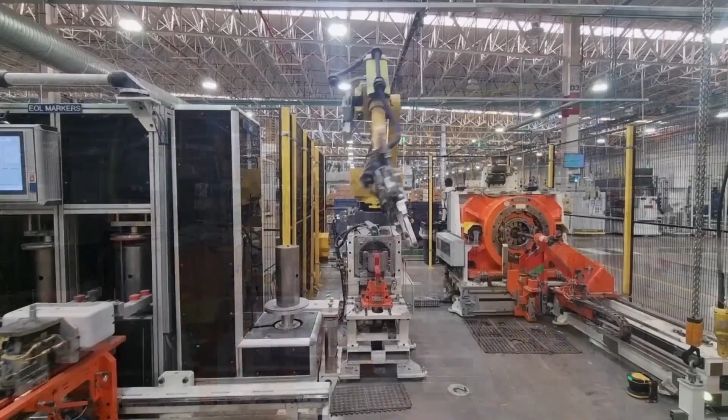Assembly lines may look like smooth operations, but it's chaos, full of disconnected systems, data silos, and clunky integrations. In this video, I show you why it's time to stop piling on multiple systems on top of your assembly line and start with a solid digital foundation. Let me introduce you to the concept of an assembly line operating system, a smarter way to build, scale, and future-proof your assembly line.

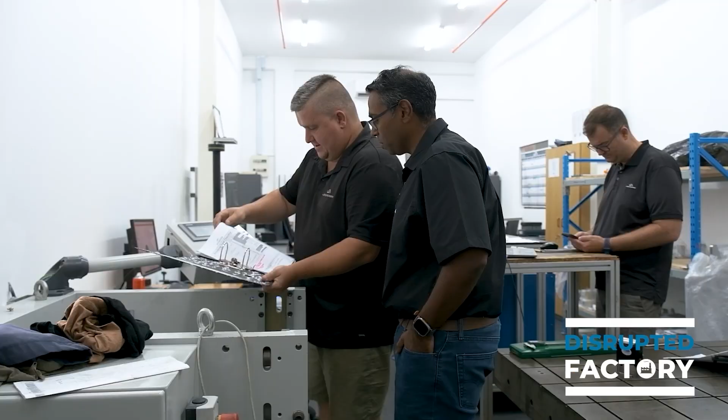So I've been in the trenches for the past 20 years, building production lines around the world. On this channel, I share with you my real-world experience for anyone looking to make a real impact in their factory. Whether you're a plant executive, an engineer on the floor, or anyone eager to expand their knowledge on this transformation topic. Let's dive in.

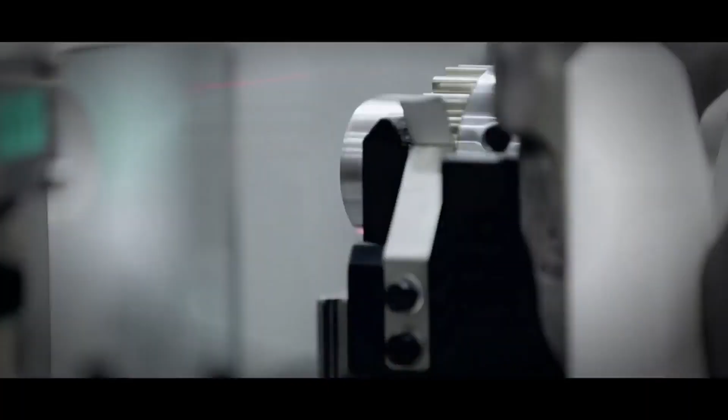Especially when you walk down a production line and you see a bunch of automated stations, assembly stations, manual stations, semi-automated stations, you kind of judge the assembly line for what it is and what you see there. Often what is misunderstood is that there are a lot of other supporting systems around that production line to actually make it work. The objective of this talk is to talk through some of those systems and why I think they're much more complex than what people think.

So to do this, I've prepared a couple of slides. The first one is really around the three main elements that need to be brought together to make a production line. And that's people, objectives, and technologies.

On the people side, we have the managers, operators, maintenance technicians, logistics personnel, line supervisors, etc. Each of these people have different objectives. So obviously productivity, availability, quality, safety. We want to train operators faster. We also want to reduce work in progress on our shop floor to reduce the cost and improve cash flow on our production lines.

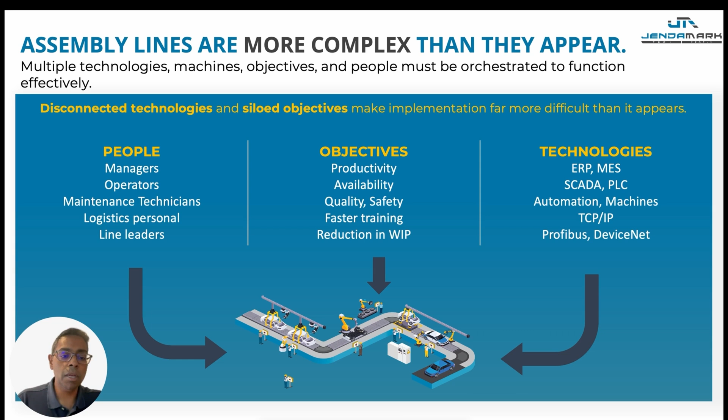And then there are a whole bunch of technologies that also need to be integrated together. So you think of things like ERP, MES, SCADA, PLC, etc., and all the different communication protocols, TCP, Profibus, DeviceNet, and that's just to name a few. There are a lot more technologies that need to be pieced together to make an assembly line work. And all of this needs to be put together and squashed into this production line to make it work. This is where we end up with disconnected technologies and data silos that make the integration of all these systems far more complex than what it may seem like at the beginning.

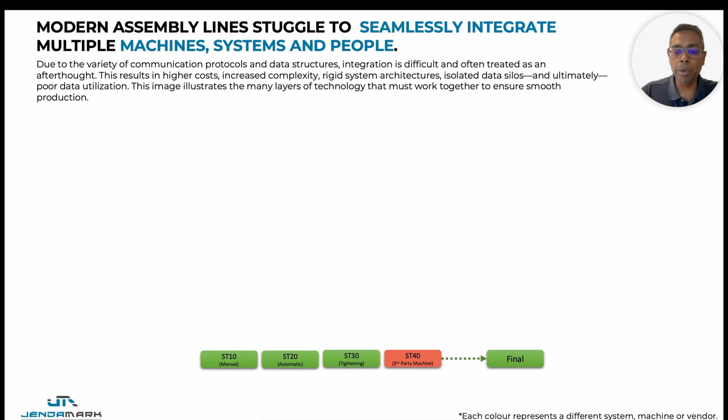Just for explanation purposes, I've got a dummy production line. Here I've got station 10, which is a manual process. Station 20 is an automatic process. Station 30 is a tightening operation. Station 40 is a third-party machine that's integrated onto this production line. Think of a testing machine or some specialized leak test machine, for example. And then we obviously have a final station where the part is inspected.

So let's build up this production line. Obviously we have some sort of transport system, so you think of a conveyor, an AGV, or a trolley system. We also very often have sub-assembly processes that need to feed into the main line. So if you're assembling an axle, there's a corner that must be assembled, and that gets fed onto the main axle assembly line.

If you have manual assembly stations, often we need some sort of worker guidance, and this could be anything from a piece of paper to some complex digital system that is implemented on the production line. What I wanted to highlight here was every single unique color on this slide represents a different system or even a different vendor that is required to implement that system.

So already we've got 3 different vendors that might play a role on this production line, and 4 if you consider the conveyor system. Then we have a bunch of automated machines. So you think of a press fit, gauging, testing machines, sometimes camera inspection stations. These are all typically PLC-driven stations.

On the tightening side, we have obviously a wide variety of tightening tools. So you think of Atlas Copco, Bosch, Desoutter, Georges Renault, and the list goes on of the number of tightening tools that are able to be implemented on a production line.

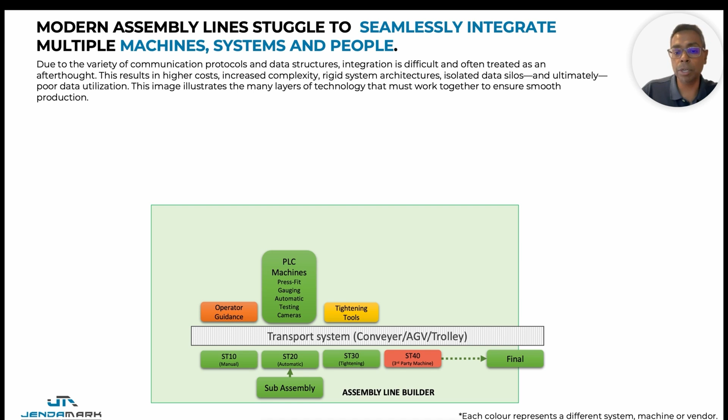And all of this that I've collated into this green box typically represents what a machine builder or a line builder would deliver to a production facility. So think of an engine assembly line, an axle assembly line. It could be a medical device assembly line or a tractor assembly line. By and large, this is what a line builder or an assembly line builder would deliver to a customer.

But obviously, the production line requires a lot more than just these elements. So let's move on. Obviously, every production line needs a sort of final buy-off, and this is where the system would go in and check all of the previous processes and make sure that everything is good before, for example, printing a final sticker.

Many production facilities have an end-of-line quality inspection, and this could be anything from a piece of paper and a clipboard that is used, or even some sort of digital system where it's on a screen and the quality inspector will now press a series of buttons to confirm that everything is good.

This is often linked to a rework or a teardown station. Often the rework and teardown station is an afterthought. So, for example, if they find a problem at the end of line quality inspection, or there's a problem with the buy-off, a product would typically go to a rework area or a teardown area.

Or, for example, if one of the processes failed at the tightening station, it might go to a rework area, for example, to be either torn down to its child components, and those components are put back on the line, or reworked to a certain point where it gets delivered to the final customer, or anywhere in between.

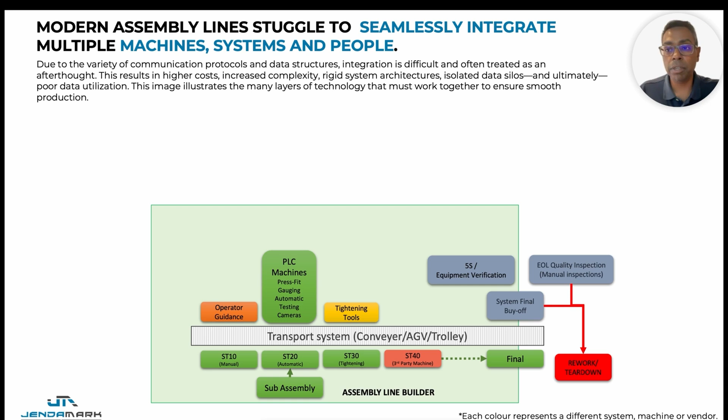And then we have probably what I think is the most important part of the production line, which is what we call process security, or the compliance control layer. So this is the rules of the production line. For example, this is where you define the sequence. A certain process must happen before another, and this is all defined in this process security and compliance control.

Other rules, for example, might be a tightening operation may be allowed to be done 2 times and then scrapped on the 3rd time. Other tightening operations may only be allowed to be done once and then scrapped, for example. A leak test operation might need to be performed before a final check at the final inspection station, for example. These rules and compliance control mechanisms need to be built into this production line somehow.

Often this is a combination of the line builder, the quality department, the product designer. They need to come together to define these rules and compliance control elements that need to be programmed into this production line. And then we have a number of, let's say, production data management tools.

So things like OEE, so collecting data to calculate OEE. Many production lines have a big ANDON display. So this is a display that sits above the production line that gives live performance data, obviously helps drive the performance of the production line. And this is now another system, often delivered by another IT company or machine building company.

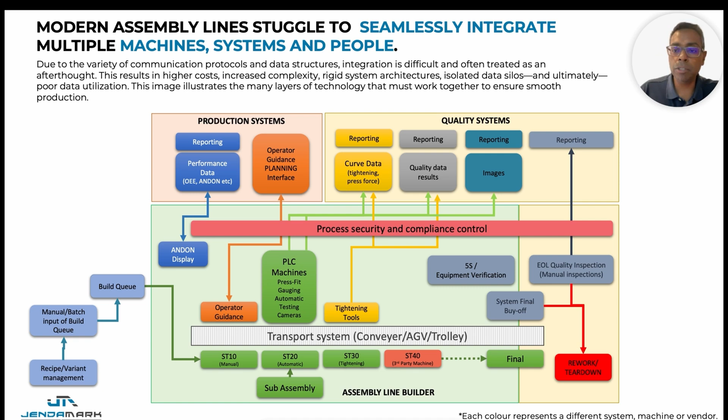Still, the production line is not yet functional because we need to tell it what to build. That comes right at the beginning of the production line, and there are two main mechanisms. One is where we have fixed variants or batch build, and these variants need to be allocated into a queue - for example, build 5 of this variant, 7 of the next, etc.

This either needs to be manually inputted into a build queue, or can be implemented with a signal sent from, for example, an ERP system. These signals are then sent to the assembly stations as well as the sub-assembly stations, because sub-assembly stations need to be sequenced appropriately so the right sub-assembly is fitted to the right assembly at the right station.

Then we have the more complex sequencing of the line, which is what we call sequencing, where we are receiving a bill of materials, for example from an ERP system like SAP, and this bill of materials is used to sequence the production line on what to build.

This is a typical automotive scenario where a customer has custom ordered a vehicle and asked for very specific features, so we need to build the components of an axle or an engine specifically for that customer. All of this is done through the build string sequencing system, and it's typically handled by the IT department.

So at least now we're at the point where the production line can actually run. But at the end of the production line, we now need to sequence the components produced on that line into different dunnages. We have to print out specific barcode labels and sheets of paper that would typically be delivered with the component to the end customer.

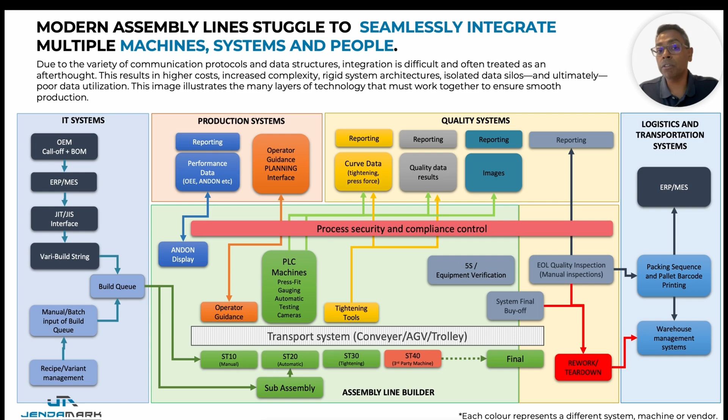And all of this complexity needs to be pieced together in such a way that the line works efficiently. Obviously this results in a number of challenges and costs to make these production lines work. I just wanted to highlight some of these challenges that you see on production lines from a day-to-day perspective.

The first one is workforce challenges. This is really centered around skills and turnover of operators on the shop floor, which results in higher training costs, rework and waste. I think many environments are experiencing this very often. And because systems are rigid, it becomes very difficult to deal with this appropriately.

So we have a lot of machine and operator inefficiency, and this is typically because we don't have enough data to measure the performance of the machines as well as the performance of the operators on the production line.

One of the big ones for me is that production management teams are very reactive. They use the data that they have to figure out what happened yesterday. They're not really using data to figure out how to prevent problems tomorrow. So they're not very proactive in solving problems that might happen tomorrow. They're very reactive in preventing problems that happened yesterday. And I think this is one of the big challenges of how we should be using data more effectively.

Often, because of these disconnected systems, you see that production lines are very inflexible because they're hard coded, and the integration between the different systems is really fixed. So making changes on a production line becomes very challenging.

Again, similar reasons, but because of these disconnected systems, you don't have deep visibility into the granular data on a shop floor because there's so many different systems that need to work together.

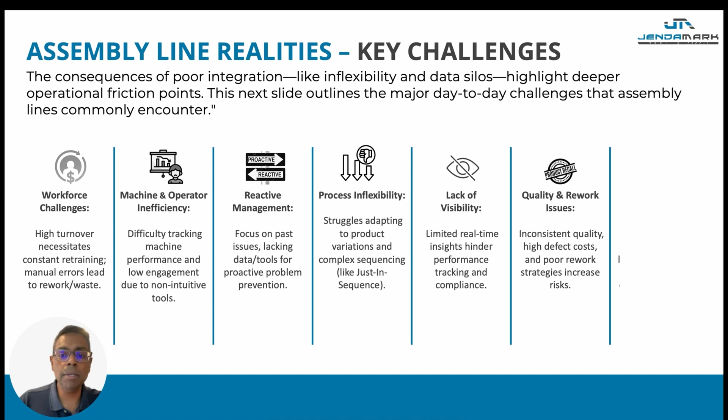And this often results in inconsistent quality, a lot of effort to figure out root cause analysis of what's actually going on. And many systems are thinking about rework strategies only at the end, and they're not building in rework strategies right from the beginning.

Already, as described, I think one of the biggest challenges that we see is these disconnected systems and data silos that result in a lot of the problems that I'm showing on the slide.

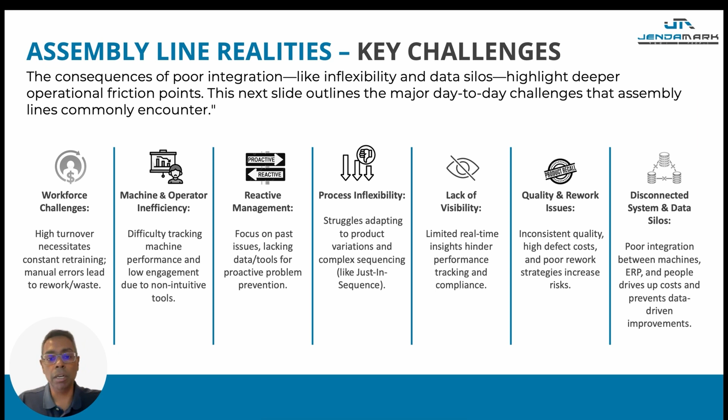So how do you fix this? I think this picture illustrates a lot of the challenges that people have experienced in trying to solve these disconnected systems on the shop floor.

What happens is they have a production line, and customers spend a lot of time and effort putting systems on top of these existing production lines, building more and more systems on top of the production line, where the production line itself, its foundation, has not been designed for all of these heavy systems on top of it.

And I use this picture to illustrate that. So I call this the golden roof on a shack analogy. Think of it as these expensive IT systems that are being loaded on top of a production line, like a golden roof. And the problem with the golden roof is that it's very expensive and it becomes extremely heavy. The more gold you put onto it, the heavier it becomes.

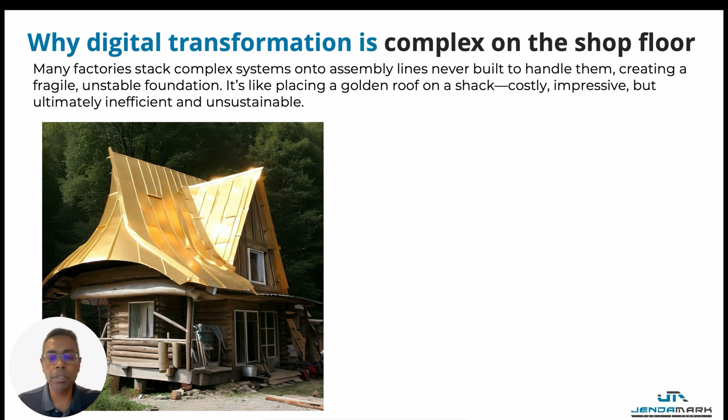And if a foundation is not strong enough to actually take the load of all of these systems on top of it, eventually it's going to come crumbling down. For me, this is one of the key reasons why digitization transformation projects on the shop floor have failed, because they've failed to understand the architecture and the foundation on which these production lines are built. And they just start to pile on these systems on top of it.

So what have we learned over the last couple of years building more than 3,000 assembly systems? Over the years, what we've realized is that we actually need to build a very strong digital foundation before we start putting the machines on top of it. And that's what we've done. We've built an assembly line operating system. Basically this is a digital infrastructure that forms the foundation of the production line, and then you can build your machines on top of that. And that allows us to scale and really expand the digitization of these production lines with many different systems.

And ultimately, that is what Odin Workstation is for our customers - this operating system, which is basically this digital foundation on which you can build all of your equipment on top of.

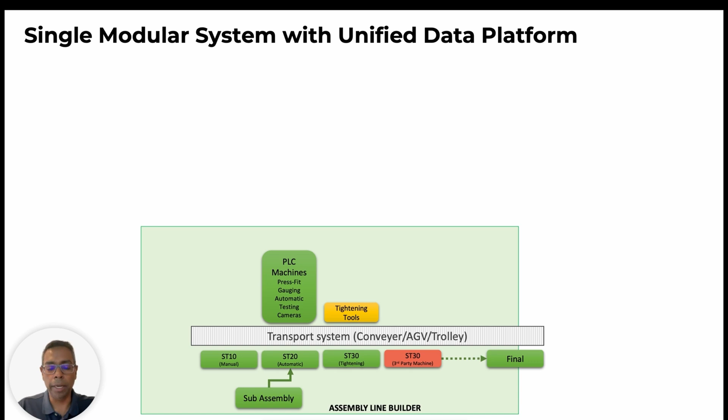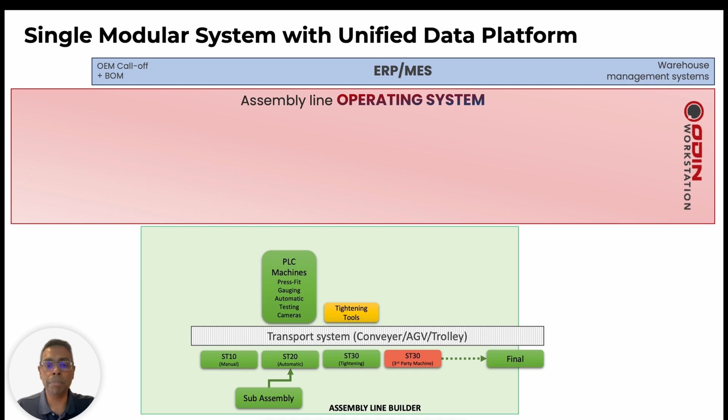So how does Odin Workstation work? Let's go back to our analogy of the assembly line that I shared earlier, that would typically be delivered by a line builder. We obviously have an existing ERP or MES system. Basically, Odin Workstation is this layer in between that we call an operating system, a seamless integration between the shop floor and the business platforms and business systems that exist in a factory.

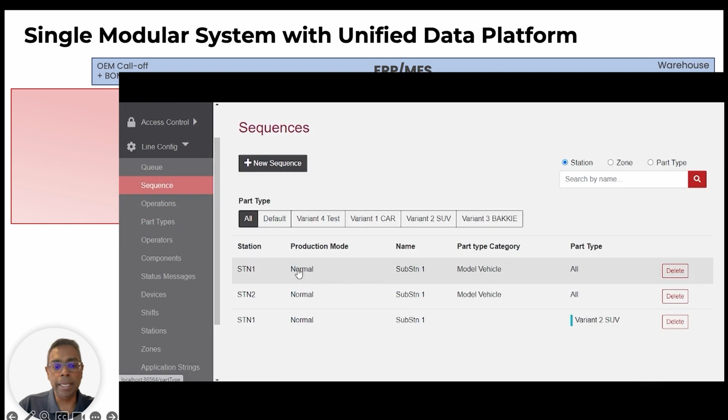So let's start with the main functions within Odin Workstation. The first one is this no-code process planning and worker guidance configuration tool. This is where we set up the process and the work instructions, and where all of the dynamic work instructions that the operator might see are configured and set up inside the system. Most importantly, this is connected to the process security and compliance control.

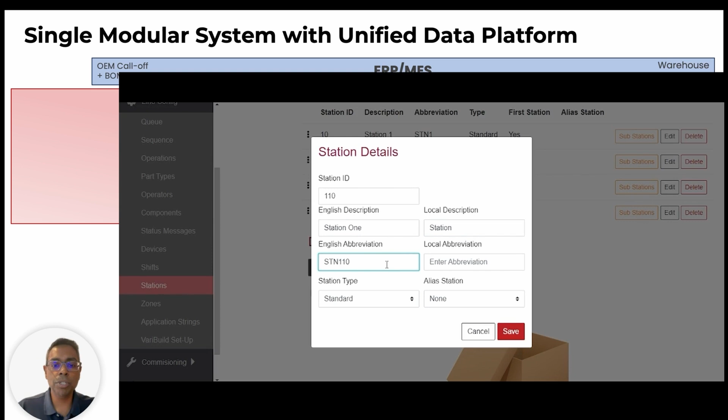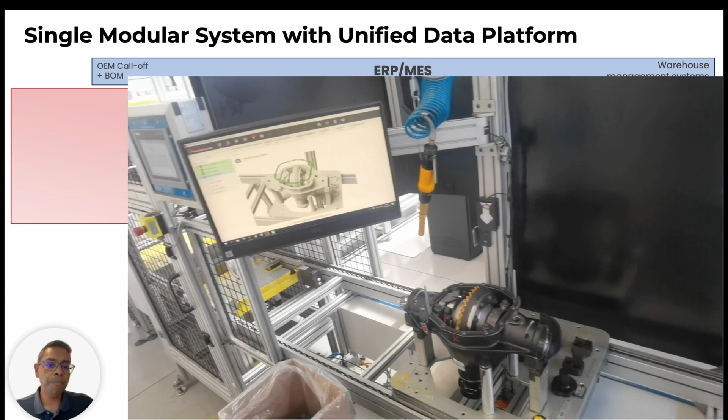So we don't have a separate system that determines the compliance and the process security layer - all of that is built into work instructions. Essentially, as you build out the work instructions in this no-code platform, you're actually defining the process security and compliance control. And why that's so important is it allows industrial engineers and process engineers with intimate knowledge of the critical processes that need to be implemented on a production line.

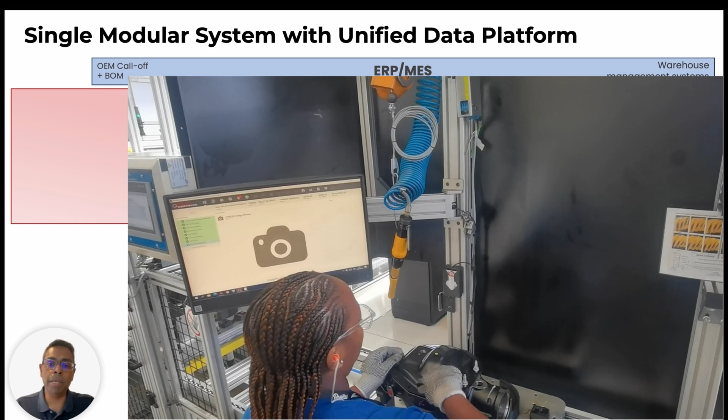As they build out the work instructions, they're actually coding these security layers into the production line through the no-code platform. That becomes a very powerful tool where we now don't have PLC programmers programming in compliance control - we actually have industrial engineers or process engineers with intimate knowledge programming this compliance control.

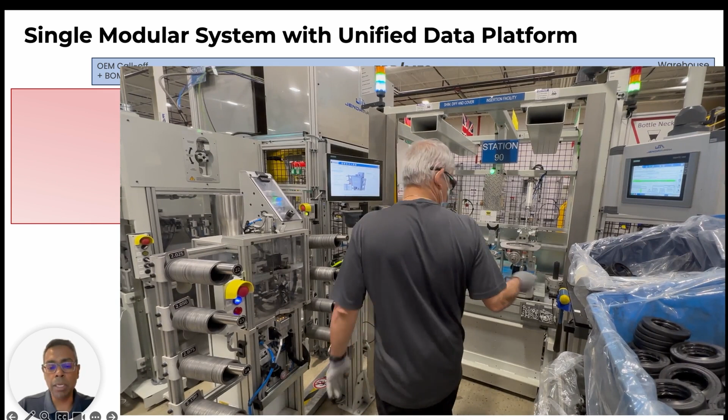Built into that, we're now able to use that compliance control to control third-party systems and third-party machines. So it doesn't only have to be Jendamark specific machines, it could be anyone's machine. What that means is we can then pick the best in class machines that can be strung together to form an assembly line.

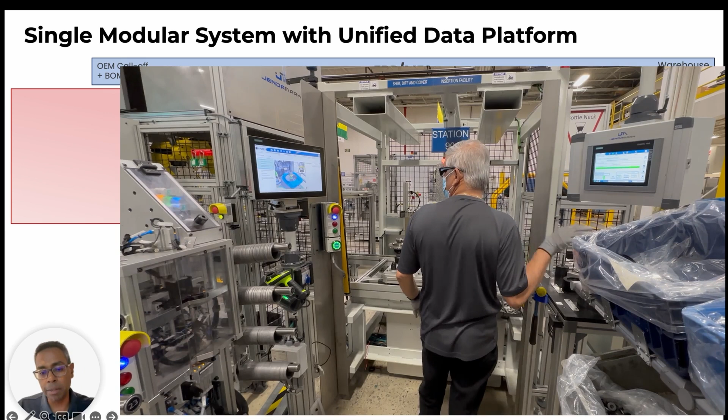You don't have to buy everything from one machine builder. You could have station 1 from the best in class manual machines, station 20 from another best in class automatic machines, and so on.

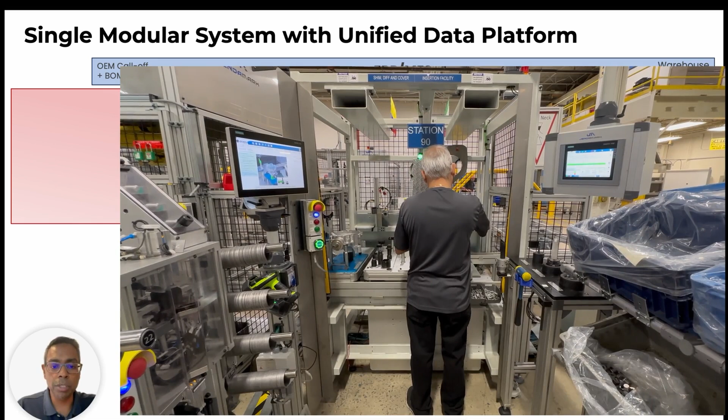And because we've aggregated the overarching process compliance out of the production line itself, we can integrate these machines into this compliance control layer and take control of these machines. More powerfully, as I've already mentioned, the control and sequencing of this process is done by process engineers, not PLC people.

Built into that whole thing right from the beginning is the rework planning module. This means that based on a failure mode that might happen in a process, we can automatically build in the rework element that needs to happen. So this could be - if a bolt fails, scrap the component, it doesn't go to rework, whereas if a bolt fails on another process, it might be allowed to go to rework.

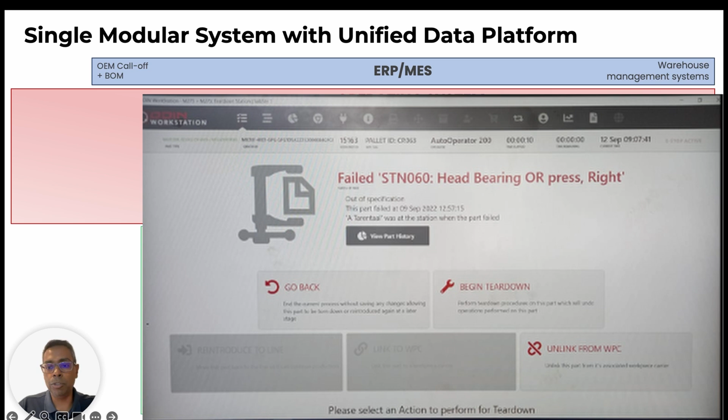By combining the process planning together with the rework planning in this process security and compliance layer, we're now able to take control of the exceptions that happen on a production line. In other words, we're taking care of reality. On any production line, we always have to prepare for these problems that are going to be faced.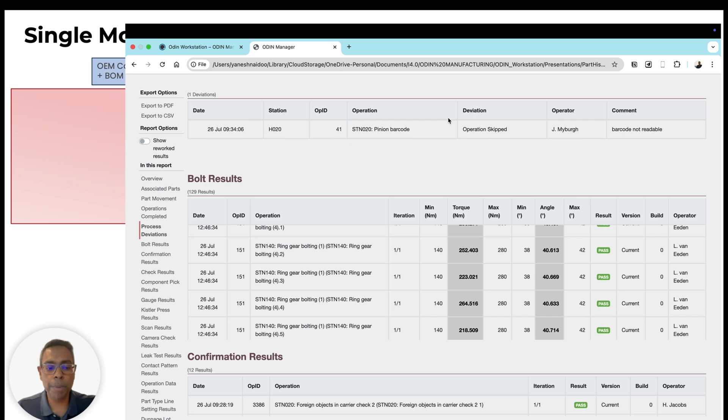The next module I'll share with you on Odin Workstation is the quality systems and lean management. The first part of that is the final buy-off. Built into the system, at the final station, Odin Workstation is doing a compliance check to make sure that every single process that was expected is actually completed, and completed with a pass signal, and we've got all of the data recorded accordingly.

And that's one of the functions that's built in - you don't need to have a third-party system do that. The next one is the end-of-line quality inspection app.

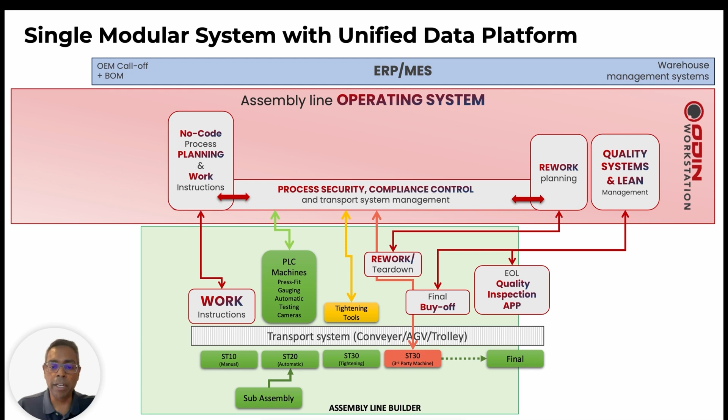So we have basically a tablet that a customer can install at the end of the production line, and there's a list of tasks that need to be checked displayed on the tablet. The quality inspection engineer can take a bunch of photos of the element being checked, so if there's ever a problem in the field, they can quickly go back to the specific product and look at the individual photos to see if the problem happened before or after the product left the production line, within a matter of minutes.

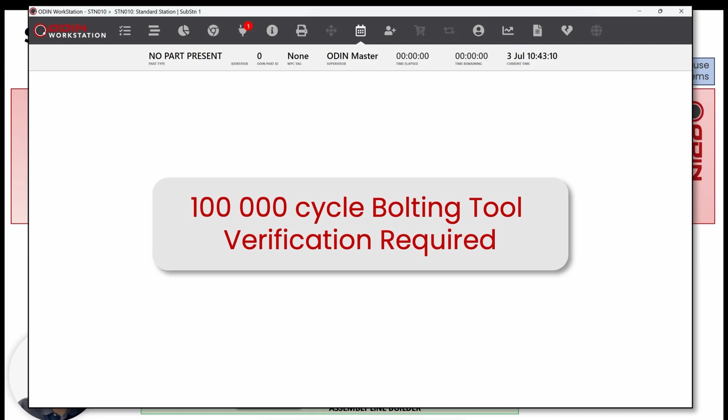And then these scheduled tasks, things like 5S, equipment verification, batch box scanning. So if you want to scan the batch of bolts used on an engine, for example, if there's ever a recall campaign required because of those specific bolts, you're able to identify exactly which engines were affected by that specific batch. That function is now built into the system, you don't need a third-party system to do that.

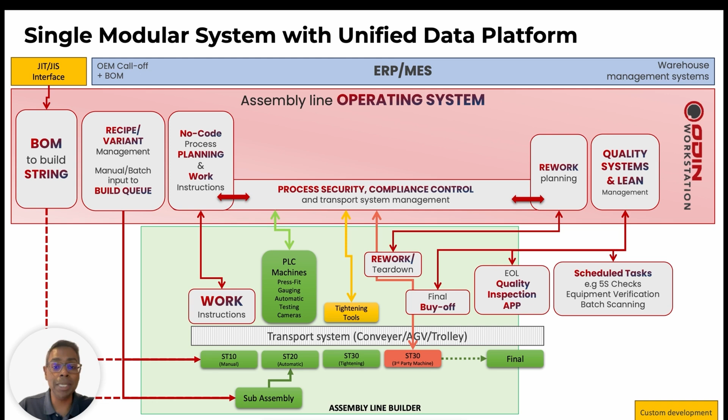And then we have the sequencing of the line, and we have the two kinds: the batch build side of things, where you can build a queue based on a specific set of variants that need to be built, as well as the just-in-sequence side of things, where we're able to sequence the production line based on a specific unique bill of materials that might have been ordered by a customer.

And finally, probably the most powerful part of all of this is that all of the data—whether it be the build sequence data right from the beginning, the process data, the quality data, the cycle time data, the performance data, OEE data, operator cycle time, operator performance, torque curves and images—are all collected in one unified data platform.

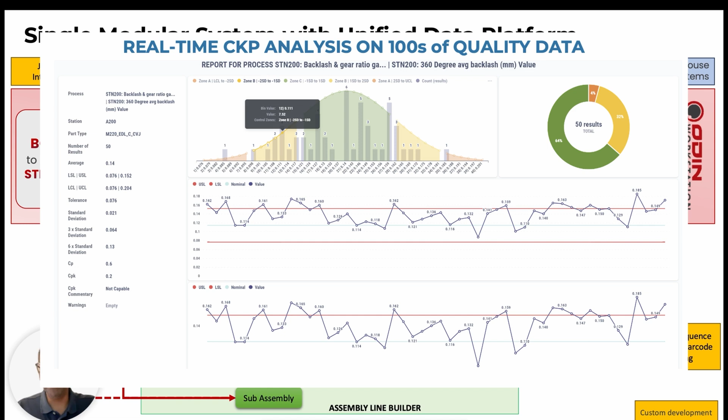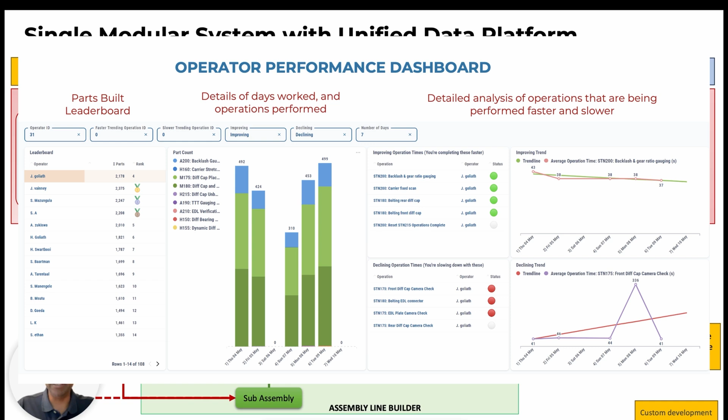This is really critical because it allows us to pass the right necessary data to third-party systems, for example warehouse management systems or the existing ERP system. More importantly, we're now able to make very useful reporting and analytics as well as predictions, because we have all of the data collected in one place, in the right context, which lets us make analytics and predictions much more efficiently and make the production line a lot more scalable. We've built in this foundational layer that we call an assembly line operating system.

And then finally, one of the newest features we've implemented is this AI virtual devices module. This is where we're using AI computer vision to remove physical devices on a production line, for example push buttons and pick-to-lights, because we're now able to track hands. We don't need push buttons—we can just track the finger going into a particular zone.

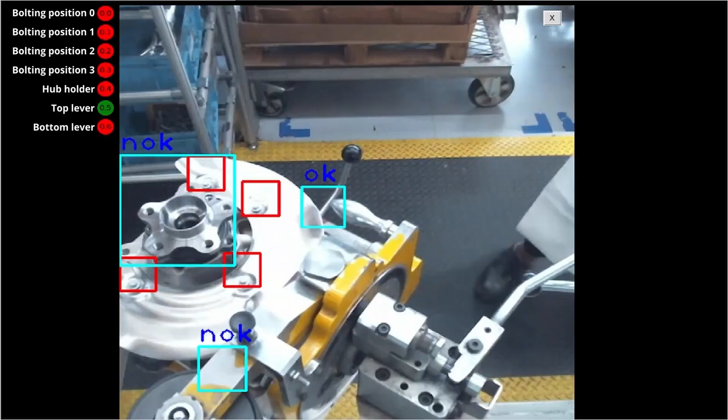We're also able to track the position of objects, for example a bolting tool in 3D space, making sure the bolting tool is in the right position before we enable it. In this way, we're able to control the sequences. This previously was only able to be done by adding physical devices, for example bolting tool manipulators with sensors to detect the position. So this is a snapshot of what Odin Workstation is, and why we call it an operating system for an assembly line.

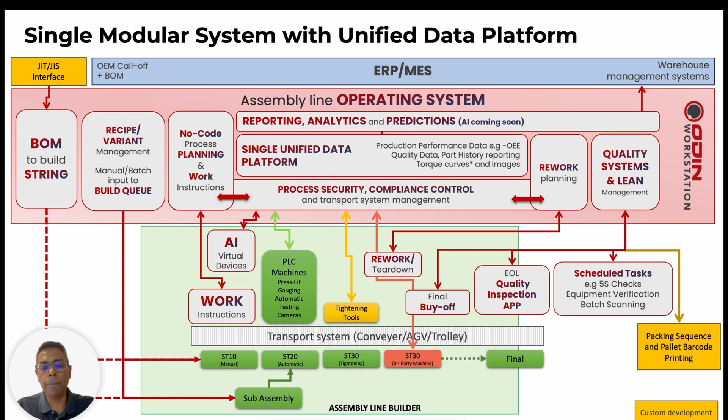We've implemented Odin Workstation in a number of countries and locations around the world. In fact, there's more than 70 production lines now using Odin Workstation with many different customers in different locations around the world.

So in conclusion, I just wanted to end off with saying that I think we need to rethink the way assembly lines are designed, and think of it from a digital perspective first—not dive into designing the machines, adding PLC systems, and then trying to integrate MES and ERP systems on top of that. I think it's really critical that when we're designing production lines, and specifically assembly lines, we think about the digital side first, the digital infrastructure, the digital backbone, and build the machines on top of that.

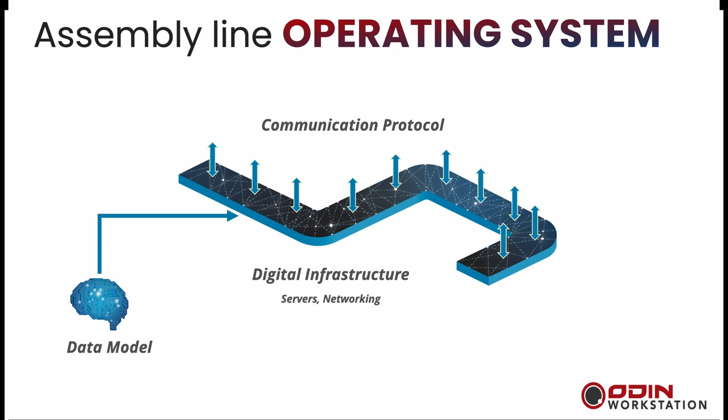That allows us to scale and use the data much more effectively, whether it be for predictions, AI analysis, or implementing large language models onto the production line. By rethinking the way we design the infrastructure of a production line, we're able to scale and expand into the future.